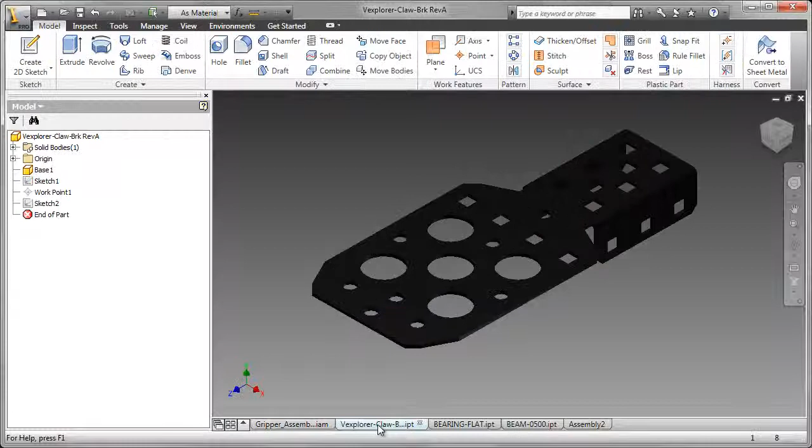With the bracket model done, we're going to go ahead and create the assembly. There are two of those brackets in the assembly. We also have a flat bearing and a 1/2 inch long beam. And I've placed some of those in this assembly already. You can see two of the brackets.

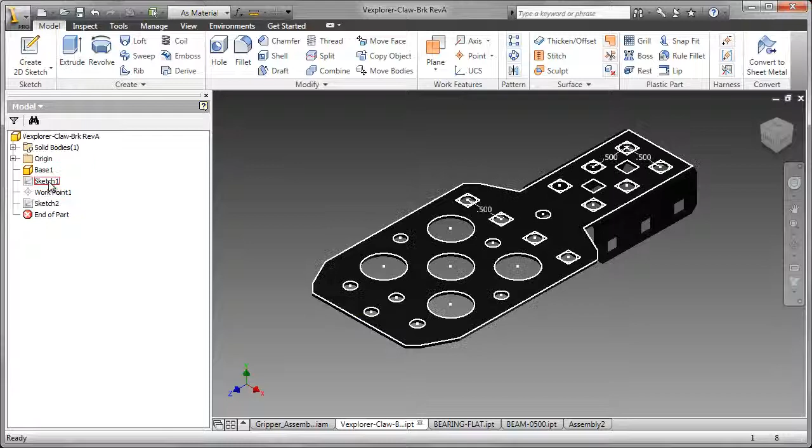I'm going to start by taking one of those 1/2 inch beams. But the first thing I'm going to do is actually ground one of the brackets. This stops it moving around. Next thing I'm going to do is open that file and make the sketch visible. You may recall that I added some circles in the sketch, and those will help with the assembly.

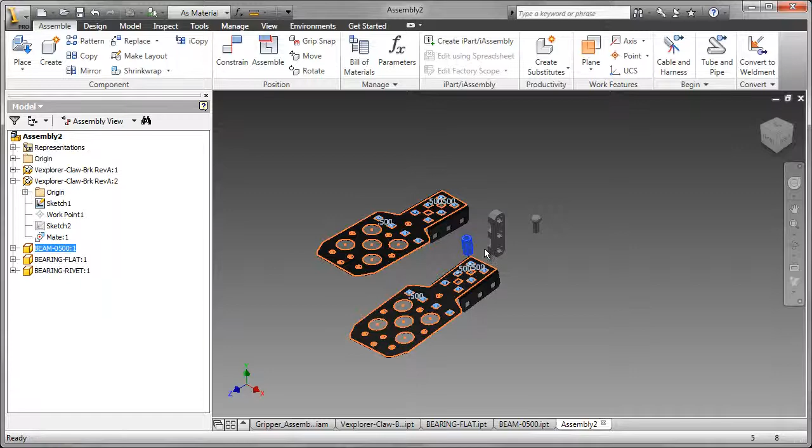With the constraint tool, I'm going to go ahead and use an axis, and that's where those circles come in handy. Click on OK. Now it's moved kind of way up to the top here, so let me drag that back down. And I'm going to finish that off by adding a second constraint between two faces. So select the face on the bracket and the top face on that little beam. It actually flips it around, but that's okay.

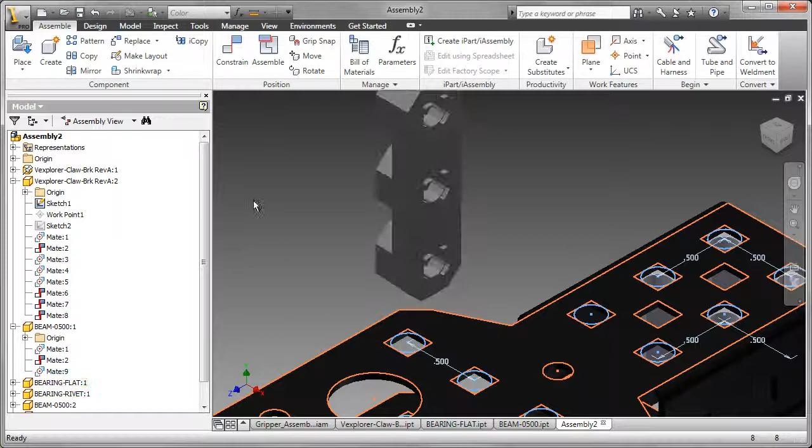Now back into the assembly. I'm going to assemble the bearing onto the bracket. The bearing is where the drive shaft of the motor will go through, plus we're going to have a couple of plastic rivets holding that onto the bracket.

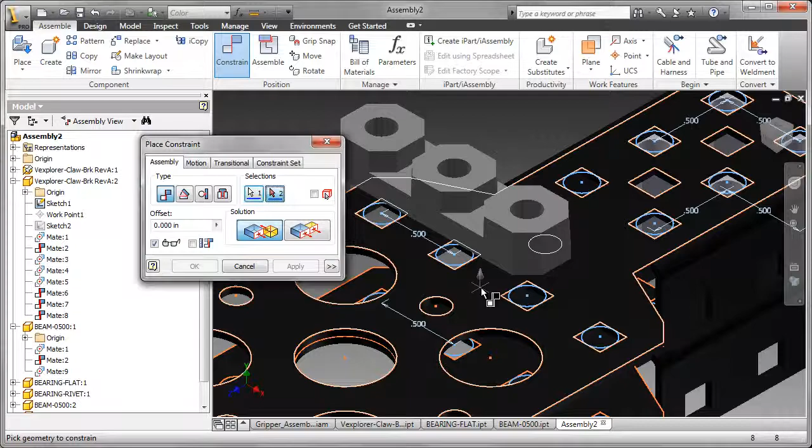So I'm starting by using axis and clicking apply, and again it's kind of moved out of the way, so let me click cancel, bring that a little closer so you can see it, and continue with the constraints. To finish off the constraints, I'll use another axis and use one of those circles again, apply, and then the two faces to bring it onto the correct area. And click OK, which finishes the process.

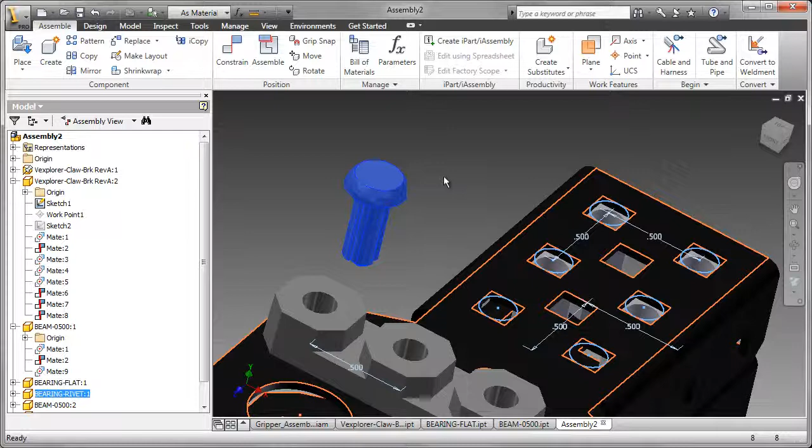We can now get one of the plastic rivets which will be holding that bearing onto the bracket. These are slightly oversized, so when you place them in the bearing, they try to stretch out, and that's what holds them in place. I'm using an insert constraint this time, so just two circular edges. Wrong way around, let's correct that, and then click on OK.

I've now added another rivet onto the bearing and brought in a new beam as well. I'm going to hold that beam in place by placing standard content from the Content Center. I'm going to go to Fasteners, Bolts, and in this case I like to look at the fact that I've actually reduced the number of items in here, and I've done that by looking at Add Edit Filter. So I encourage you to reduce the number of entries in Content Center.

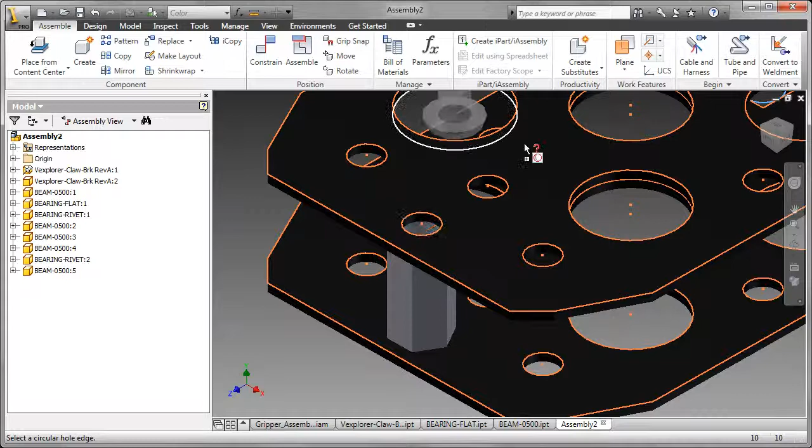I'm going to go to a socket button head cap screw. You'll notice that as I move around it actually selects the size for me if there's a standard size that fits one of those holes. I actually know the size, so I'm going to go to Change Size. It's a number 8, 1/4 inch long, and the thread type is UNC. Now there's a few of those, but I'm going to actually just place one so you can see how the process works.

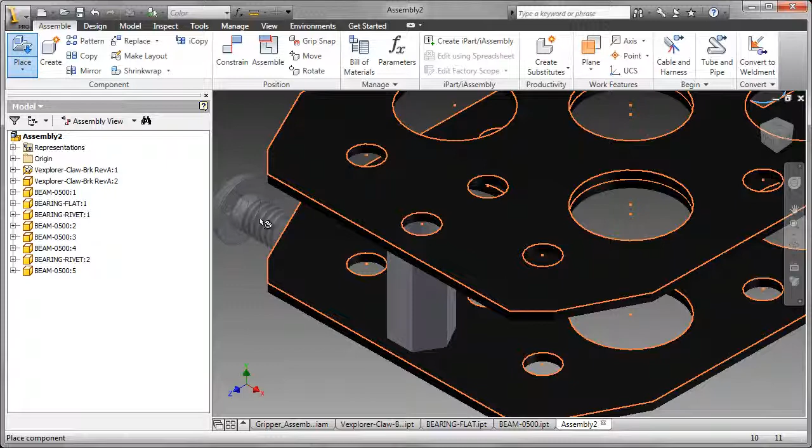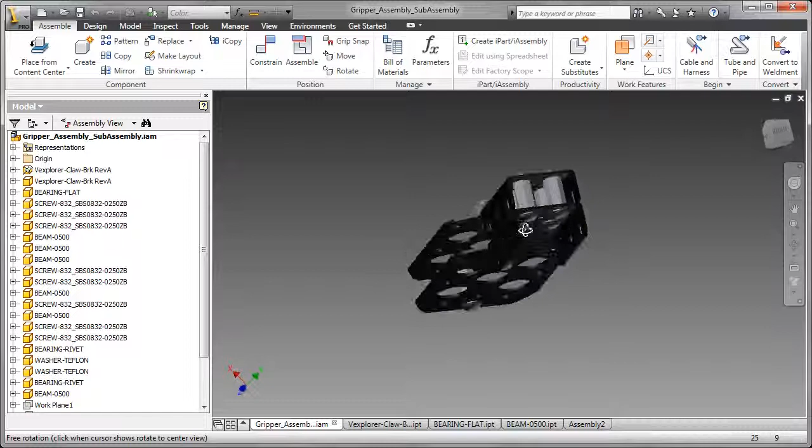I can now go ahead and constrain that using an insert constraint. Select the bottom circle, circle on the sketch, and click on OK. We can now see I've added many more, and this is actually now complete. So there are 4 more of those beams, complete with nuts and bolts there. And I've also added a couple of washers. These belong to the motor. You can add them here or in the main assembly.